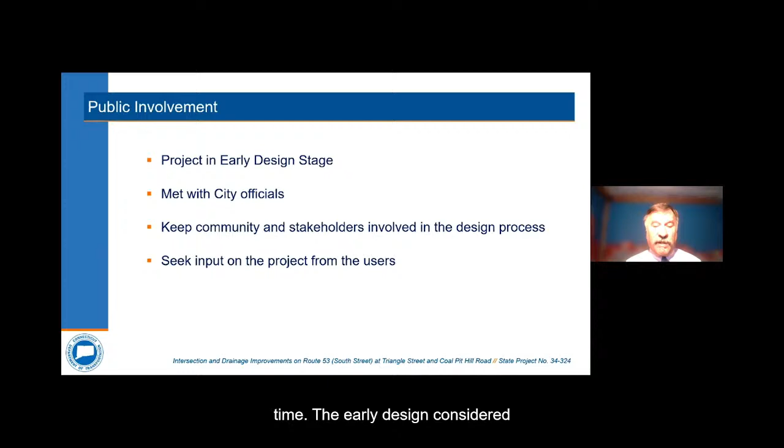And with that, I'm going to turn the presentation over to Al Bisacki, again from Kleinfelder. He's the design project manager here today. Al? Thank you, Brett. So as was noted, this project is early in the design phase, although it has been going on for quite some time. The early design considered alternative designs, and traffic analyses were completed on those alternative designs. Once a preferred alternative was selected, preliminary engineering and design was completed, and there were several meetings with city officials along the way, and we also solicited input, and I'll talk a little bit more about that in a few moments.

So as an overview, this project is located on the east side of the city, as can be shown on the map on the left-hand side. It involves several streets and intersections, and in the following slides, I'll describe the location in more detail and the proposed work.

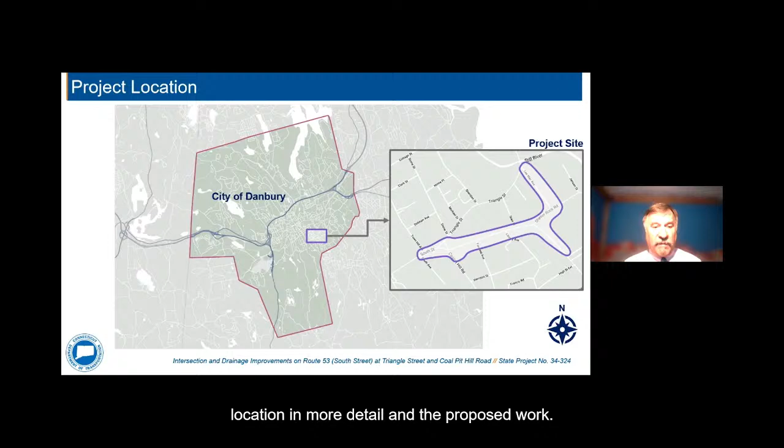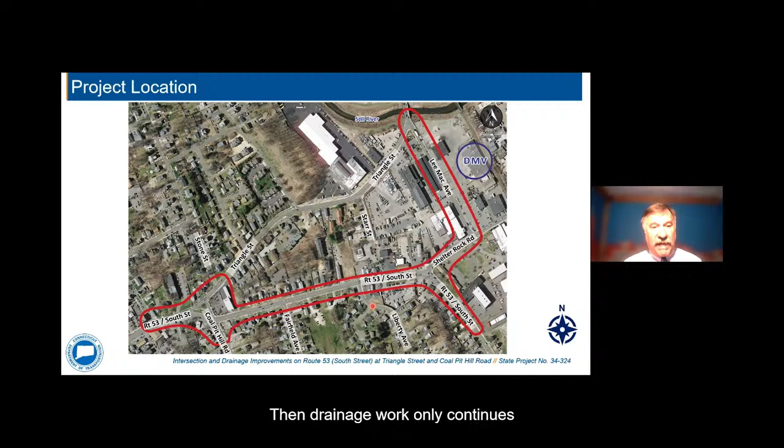The project starts on South Street, or Route 53, at the intersection of Town Hill Avenue. Moving west, it includes the intersection at Triangle Street and Coal Pit Hill Road. Then drainage work only continues down South Street to the intersection of Shelter Rock Road.

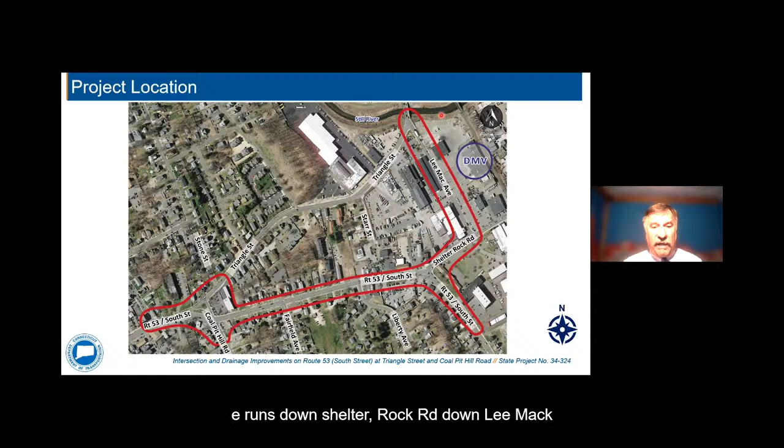There's additional drainage being done south of Shelter Rock Road. And then a major drainage outlet trunk line runs down Shelter Rock Road, down Lee Mac Avenue, and discharges at the Still River.

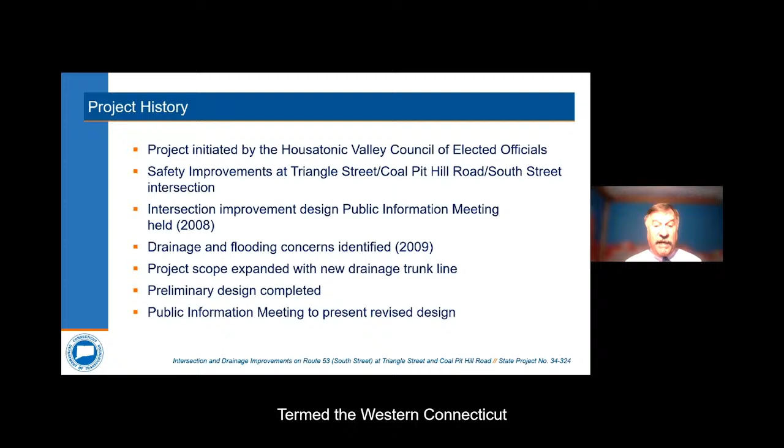Originally, this project was initiated as a safety improvement project. The City of Danbury was working with the Housatonic Valley Council of Elected Officials, or HVCEO, which is now termed the Western Connecticut Council of Governments. Originally, HVCEO submitted a proposal for the project to be developed. DOT, in coordination with the city, developed conceptual plans which received the endorsement of the city and HVCEO.

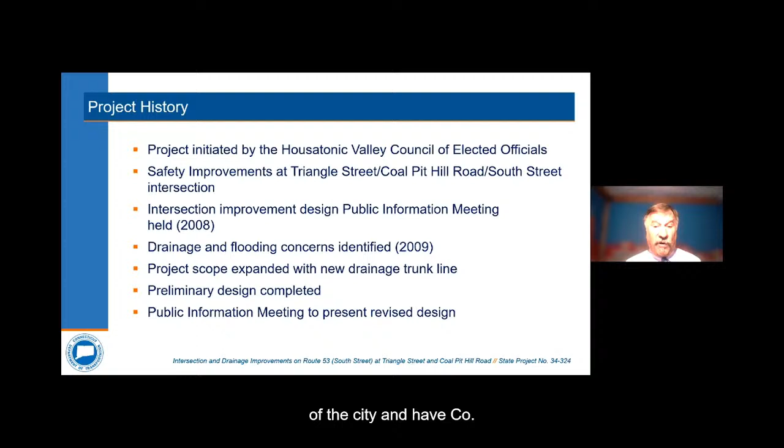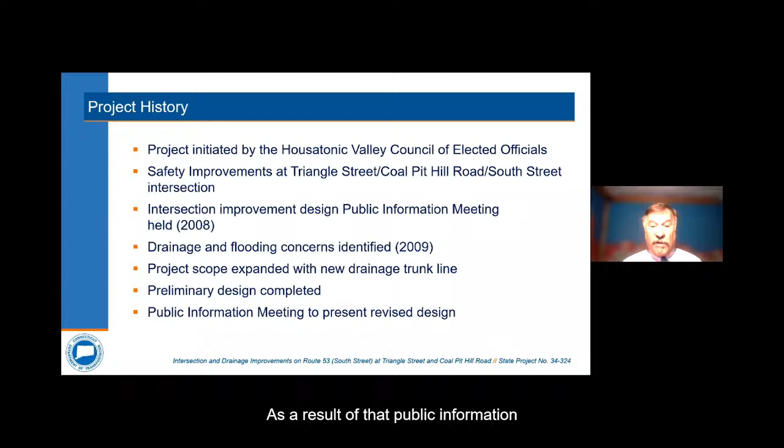Project design originally began in October of 2006. In 2008, the intersection improvements design received approval from DOT. A public information meeting similar to this one was held in 2008. As a result of that public information meeting and further discussions with the city, additional drainage and flooding concerns were identified in 2009.

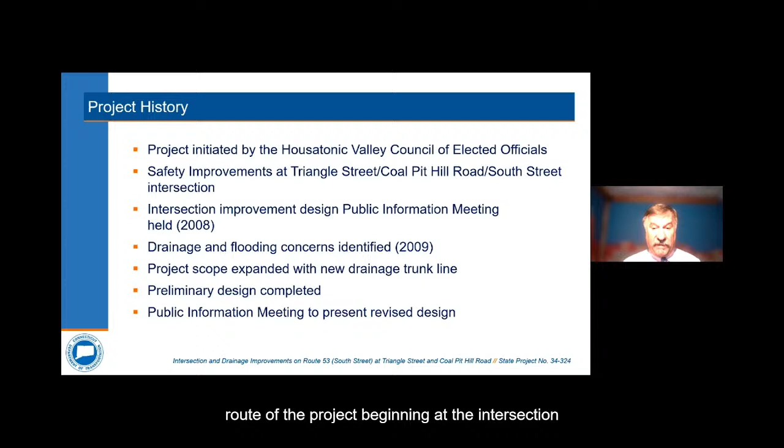In 2014, the scope for the project was expanded to include drainage along the entire route of the project, beginning at the intersection of Triangle Street and South Street, and a large diameter trunk line extending all the way to the Still River. In 2017, the preliminary design was updated to include that drainage work.

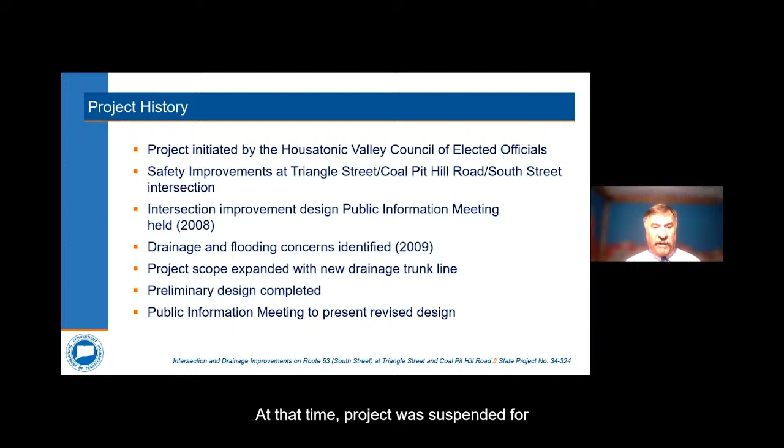At that time, the project was suspended for several years, and minor changes were made to the intersection lane arrangements at the Triangle Street Coal Pit Hill Road intersection. That brings us to today, where we're presenting the revised design in this public information meeting.

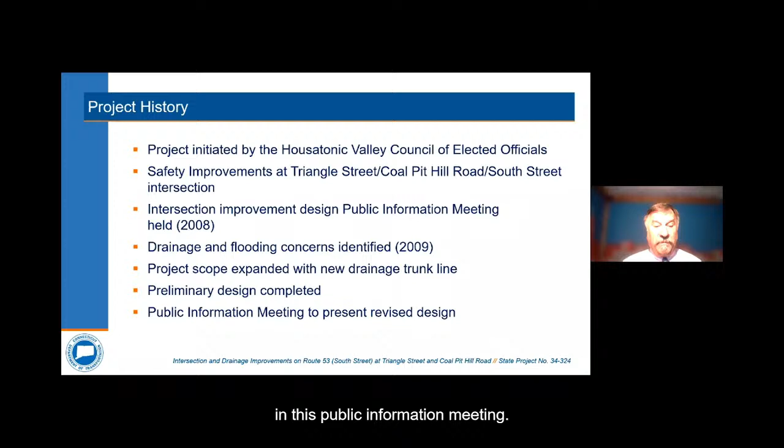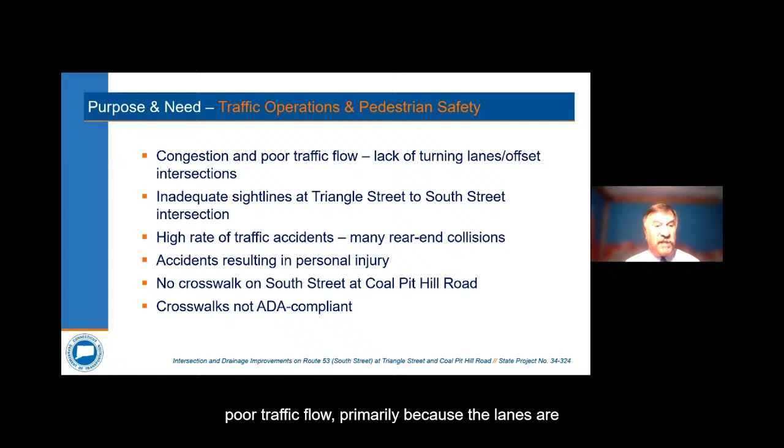So there are several purpose and need statements that drive and are goals for this project. The first revolves around traffic operations and pedestrian safety. There is congestion at the intersections and poor traffic flow, primarily because there's a lack of turning lanes, and the intersections are offset from each other. There are inadequate sight lines at Triangle Street to South Street.

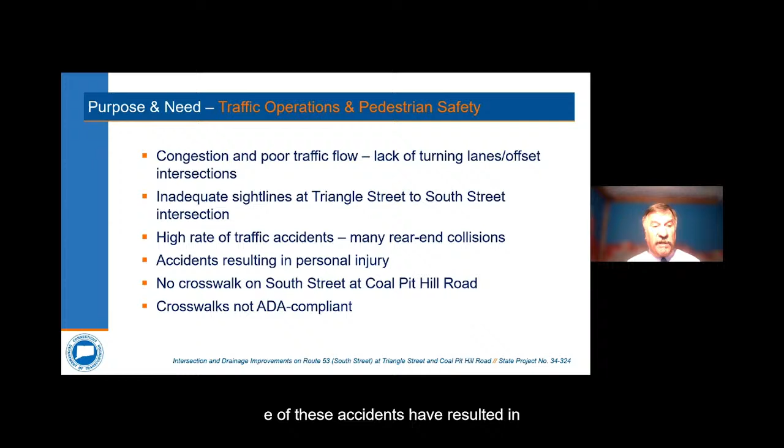There's a high rate of traffic accidents, many of which are rear-end collisions. Some of these accidents have resulted in personal injury. There are no crosswalks at South Street near Coal Pit Hill Road. And what crosswalks do exist within the project area are not ADA compliant.

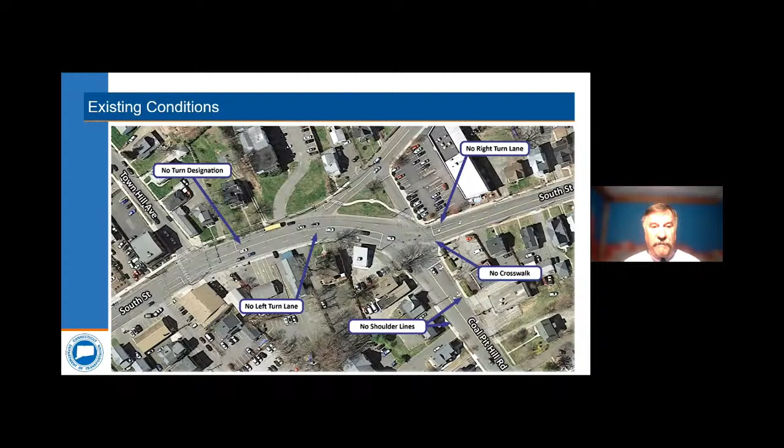So here's a map that shows what I just described. There's a lack of turning lanes at the intersections. The intersection of Coal Pit Hill Road and Coal Pit Hill Road Extension and Triangle Street are offset from each other. There are no crosswalks across South Street or Route 53, and the crosswalks that do exist are not ADA compliant.

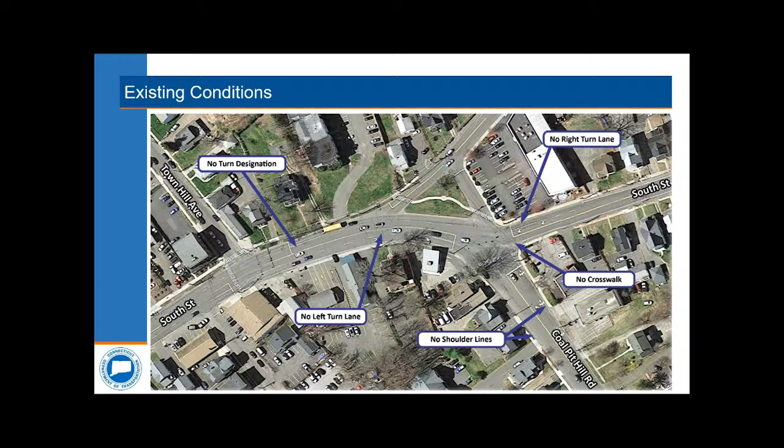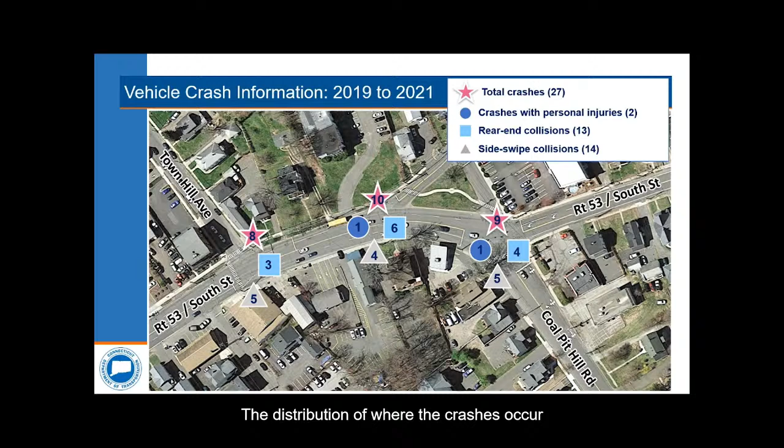The types of crashes include rear-end collisions and sideswipe collisions. And the split between those 2 types of collisions is about 50-50. Additionally, the distribution of where the crashes occur is about equal between the 3 intersections of Town Hill Avenue, Triangle Street, and Coal Pit Hill Road.

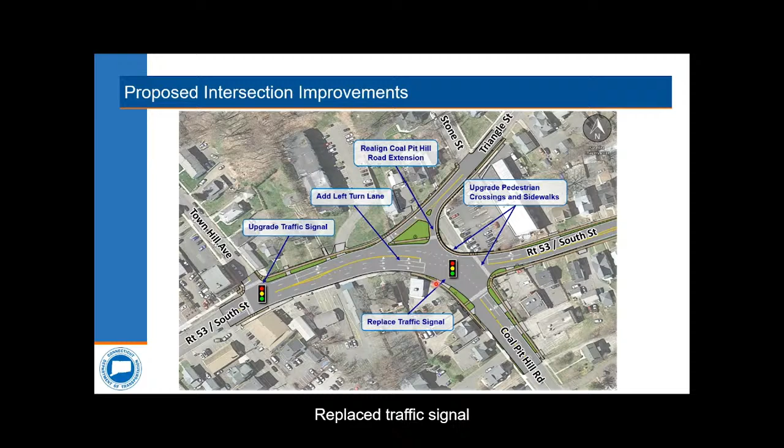The proposed intersection improvements include an upgraded traffic signal at Town Hill Avenue, an additional left lane approaching Coal Pit Hill Road so that traffic can turn safely onto Triangle Street, a replaced traffic signal at Coal Pit Hill Road, a realignment of Coal Pit Hill Road Extension with Route 53 to take advantage of the installation of the new traffic signal and improve safety, and upgrading pedestrian crossings and sidewalks throughout the project area in the vicinity of this intersection from Town Hill Avenue to Coal Pit Hill Road.

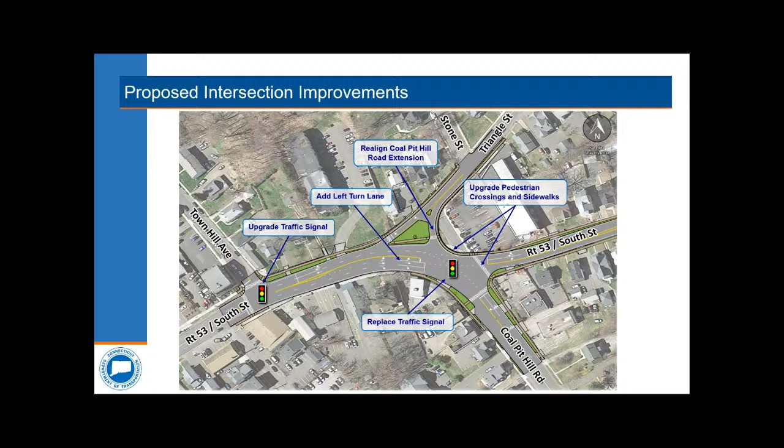With regard to the new traffic signals, the project goal is to make safety improvements without degrading or reducing what's called the level of service at the intersections. And very briefly, level of service is a measure of the delay experienced at an intersection, with A being good and F being poor. By way of reference, level A is when the delay to start moving when the light turns green is less than 10 seconds. At level C, when the light turns green, you have a delay of between 20 and 35 seconds. Level F is when there's over 80 seconds of delay after the light turns green.

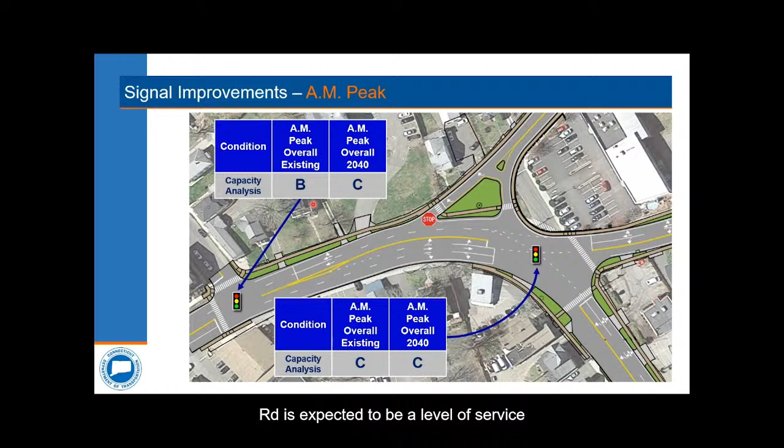So looking at the 2 traffic signals, when the project is complete, I should say, the level of service at Town Hill Avenue is expected to be a level of service B. In the year 2040, that will reduce slightly to a level of service C. At the Coal Pit Hill Road intersection, the when-complete level of service in the morning is expected to be C, and that remains level of service C in the year 2040.

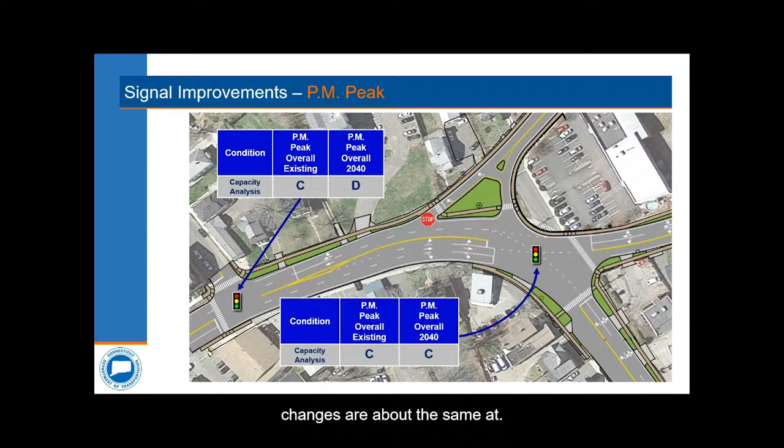In the afternoon, the level of service changes are about the same. At Town Hill Avenue, after construction is complete, we expect it to be a level of service C. In the year 2040, the level of service D is expected. At Coal Pit Hill Road, we maintain a level of service C when complete and in the future.

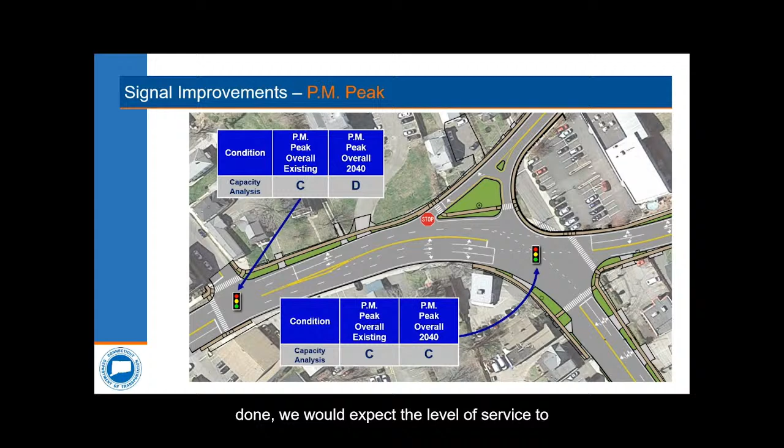And I would like to say that without traffic signal installations and without these improvements being done, we would expect the level of service to degrade further than level of service C and D at the intersections in the year 2040. The goal of this project, after all, is to improve safety without significantly impacting traffic operations, and this design will meet that goal.

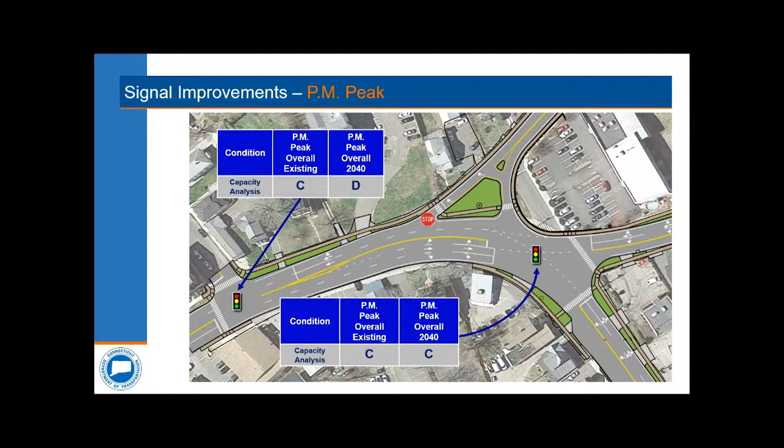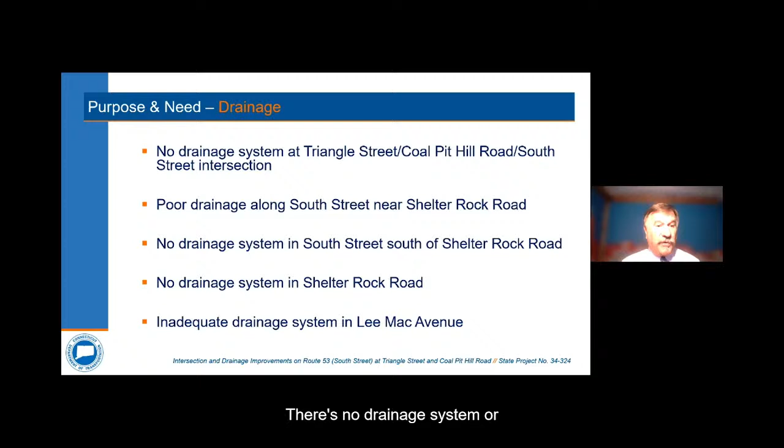The second purpose and need for the project, as was added on after the original public information meeting, is to improve drainage. There's no drainage system at all at the intersection of Triangle Street, Coal Pit Hill Road, and South Street. There's poor drainage along South Street near Shelter Rock Road. There is no drainage system in Shelter Rock Road. There's an inadequate drainage system in Lee Mac Avenue.

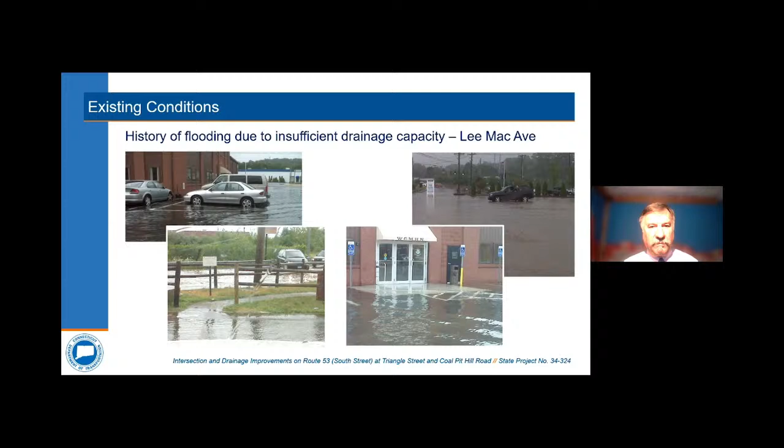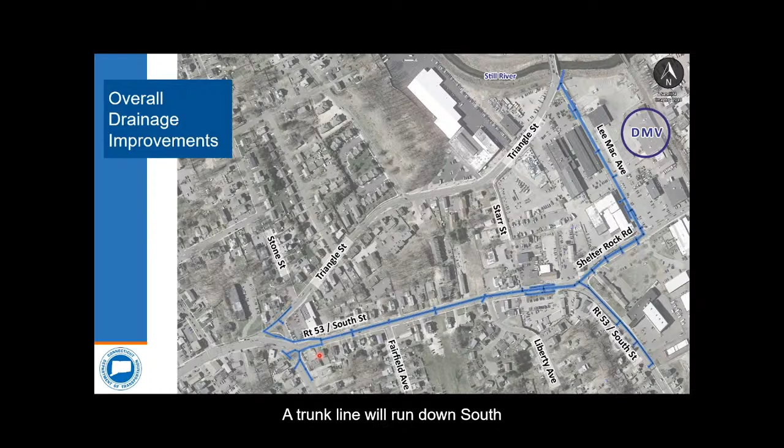This slide shows the overall drainage improvements throughout the entire project, and the proposed drainage is shown in the dark blue line. So beginning at Triangle Street, we are planning catch basins at the intersections, and I'll show that in a little bit more detail on the next slide. A trunk line will run down South Street with catch basins on both sides of the road. At an existing cross culvert, at a low point, there'll be additional catch basins. The trunk line will continue down Shelter Rock Road, then down Lee Mac Avenue, and will discharge at the Still River.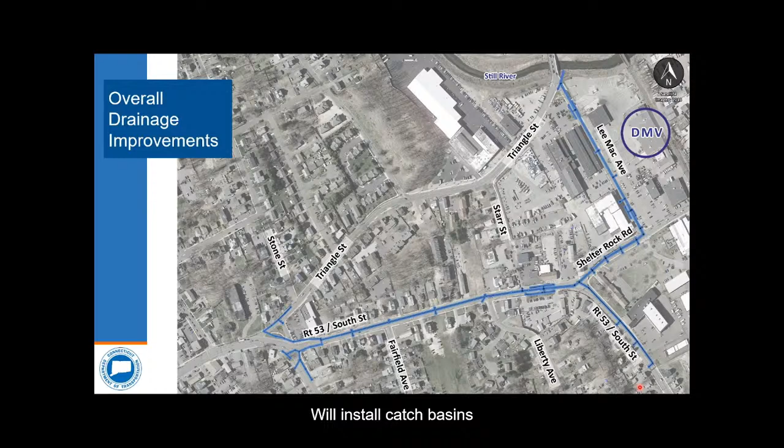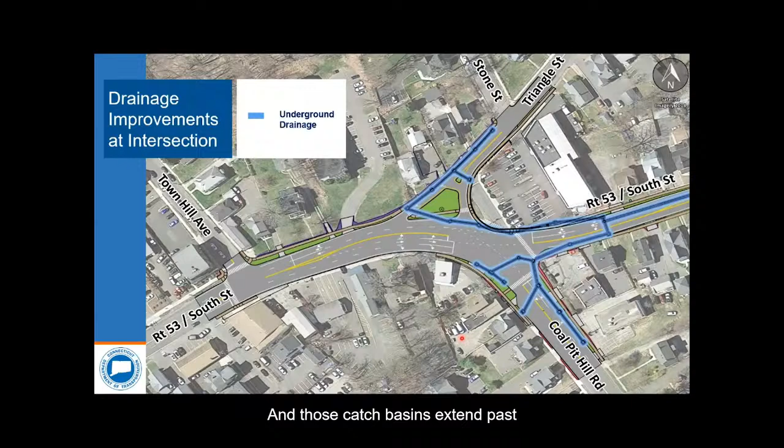Additionally, south of Shelter Rock Road on South Street, we'll install catch basins as far as is practical to improve drainage along that road. At the Triangle Street, Coal Pit Hill Road intersection, there are a number of new catch basins, and those catch basins extend past the intersections down Coal Pit Hill Road as far as we could practically go, and up Triangle Street again as far as we could practically go. The purpose of these catch basins is to reduce flooding and to increase safety for vehicles and pedestrians alike.

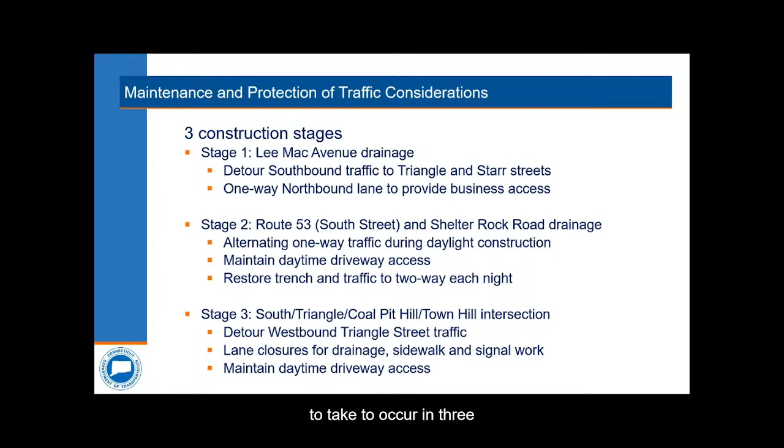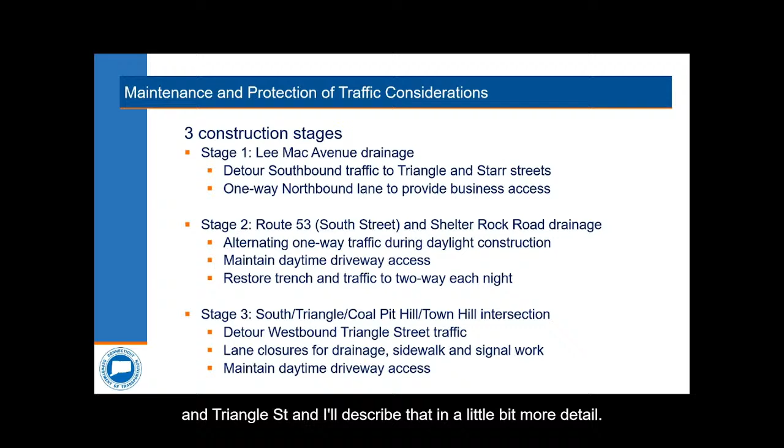Construction of all this work is expected to occur in 3 distinct stages. The first stage begins at the outlet of the Still River. The second stage continues along South Street, and the third stage is at the intersection of Coal Pit Hill Road and Triangle Street. And I'll describe that in a little bit more detail for each of the stages.

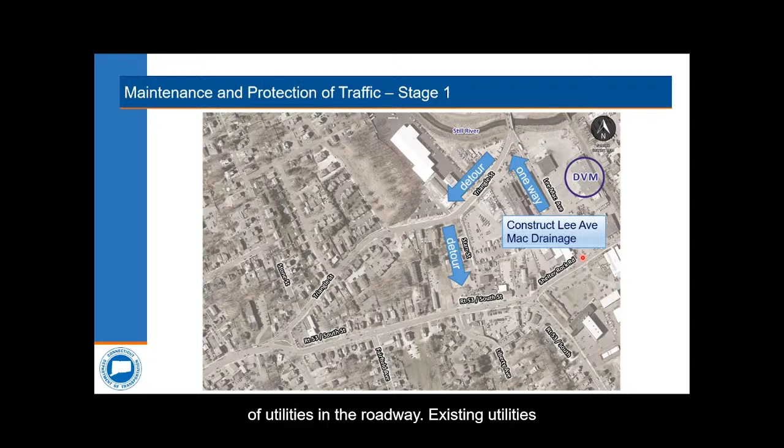Under the first stage, when the main trunk line is constructed from the Still River upstream in Lee Mac Avenue, because of the size of the pipe that needs to be installed and the amount of existing utilities in the roadway, we expect that we'll need one-way traffic on Lee Mac Avenue in the north direction, and traffic in the southerly direction on Lee Mac Avenue will be detoured onto Triangle Street, then to Starr Street, then back onto Route 53. We will provide access to all businesses and properties along Lee Mac Avenue and for all of the roads on the intersection at all times.

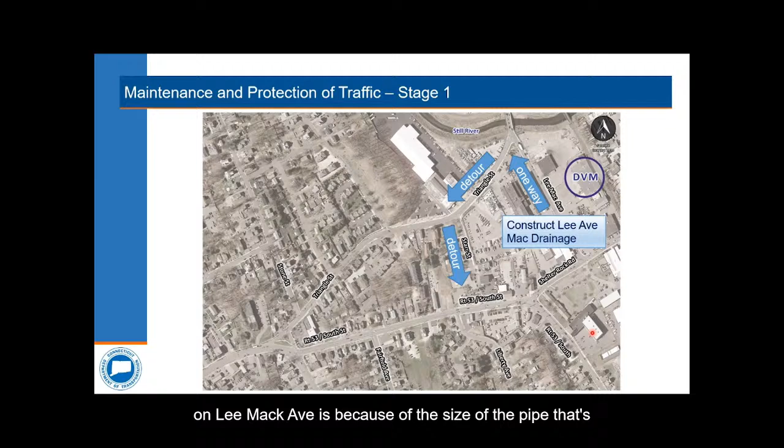Again, the reason for the restriction of one-way traffic on Lee Mac Avenue is because of the size of the pipe that's needed. And we do, of course, recognize that the Department of Motor Vehicles is on Lee Mac Avenue, and access to the DMV will be maintained at all times.

In stage 2, that trunk line, which starts to get a little bit smaller as it moves upstream, will be installed along Route 53 or South Street. For this section of work, we expect that we will have alternating one-way traffic around the construction zone as it advances from east to west up Route 53. This one-way traffic flow will be maintained either by temporary traffic signals or traffic persons. Once again, we will maintain driveway access to all properties at all times.

In the evening, we expect that the trench will be restored, covered with trench plates, and two-way traffic will resume for the nighttime hours. So there will be alternating one-way traffic during work hours only.

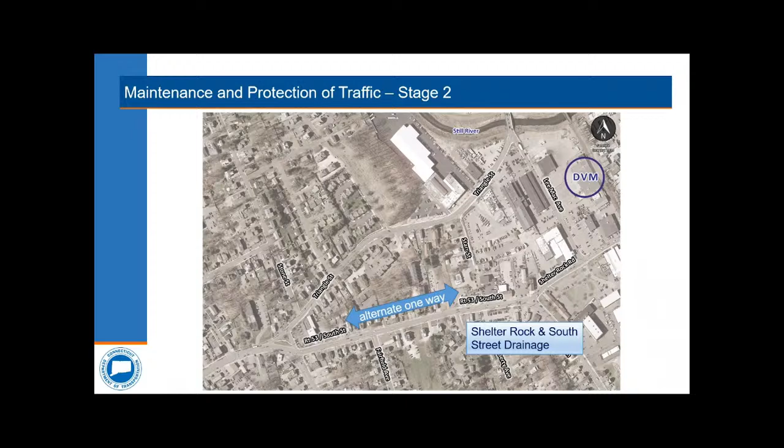In stage 3, the work will continue around the intersection of Triangle Street and Coal Pit Hill Road, then to Town Hill Avenue with the new traffic signal. We expect that there'll be individual lane closures as the drainage is installed, as the signals are installed, and as the crosswalks are installed. And once again, we will maintain daytime access for all properties.

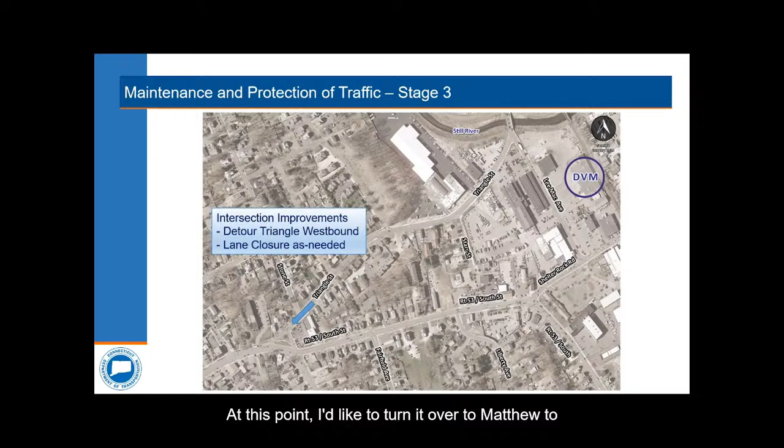At this point, I'd like to turn it over to Matthew so he can discuss the right-of-way process. Thanks, Al. I'm Matt Giannakopoulos. I'm a project coordinator with the Department's Division of Rights-of-Way. It is our office's responsibility to acquire all the property rights that are needed for transportation projects. We anticipate that this project will require the acquisition of some property rights, so I'd just like to give a brief overview of our right-of-way acquisition process.

We're still early on in the design process, so we don't have specific details on the property rights that will be required, but we anticipate the need for some strip or sliver acquisitions along the frontage of properties adjacent to the roadway, as well as some easements or drainage rights-of-way for the reconstructed drainage. But we do not anticipate impacting any homes, businesses, and no total takes of any properties are proposed.

Any property rights that end up being required will be acquired in accordance with the Connecticut General Statutes sections 13A-73 and 13A-98E. And whenever there is federal money used in any phase of a project, the department must adhere to what is known as the Uniform Act. You can go to the next slide.

Once the design has moved to the point where we're ready to begin the right-of-way acquisition process, each property owner will receive a letter of intent to acquire from our office along with a property map which depicts the exact rights to be acquired. At that point, we determine the fair market value of those rights, and we use that value to establish an offer of just compensation. That offer is then sent out to the property owner in writing, and a right-of-way agent is available to meet with the property owner.

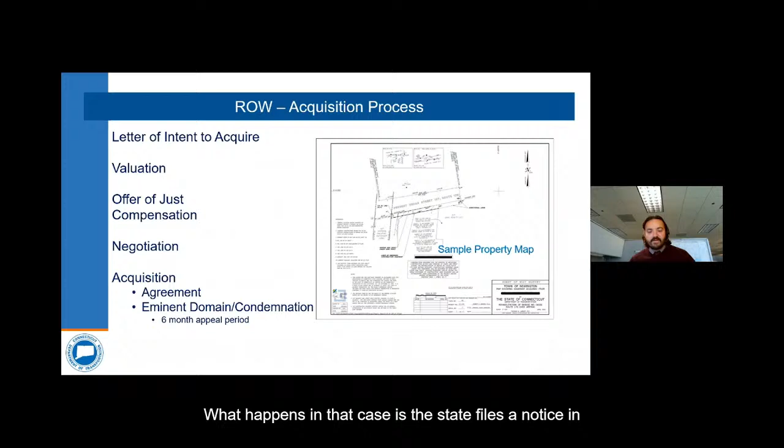However, if negotiations reach an impasse, in order to keep everything on schedule and allow the project to move forward, the department may acquire those rights through its power of eminent domain. What happens in that case is the state files a notice in the local superior court along with a monetary deposit in the amount of the state's offer of just compensation. The property owner would have 6 months from that date to file for an appeal if they felt that the offer was inadequate. Now, whether or not the property owner chooses to use their right to appeal, the money that was deposited in the court is available to be withdrawn by the owner at any time.

So I know a lot of people, they hear eminent domain, they think, oh, the state just takes my house for $1. But that's not the case. All property owners are entitled to at least that original offer of just compensation, and the state only takes title to the property rights that they need for the project. I'll be here after the presentation and going forward to answer any questions on the right-of-way acquisition process. But in the meantime, I'm going to hand it back to Al to conclude the presentation.

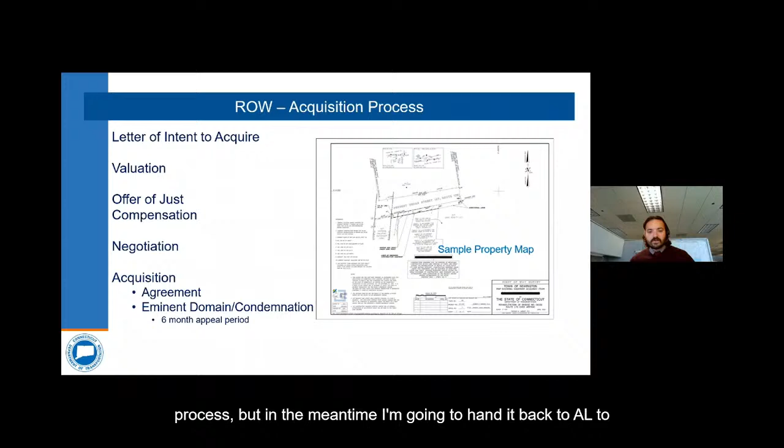Okay, thank you, Matthew. So the final couple of slides revolve around environmental review and then cost and schedule. So the preliminary engineering work that we did included some work on permits to determine what the impacts of the project are and what the permit needs are. We have determined that there are no endangered species within the work areas and that there will be no effect on historic properties. The primary permit that we do need is a stormwater discharge permit for construction of the outlet to the Still River.

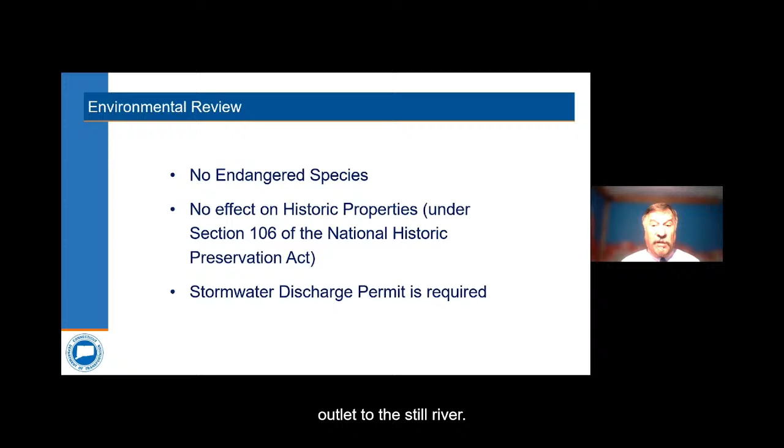So our current schedule is that design will continue beginning this summer at the conclusion of this public information meeting and the follow-up work that needs to be done after that. The design work will continue through the fall and winter, and we expect it to be complete by June of the year 2023. This will allow us to advertise for construction contractors in the summer of 2023. That will allow a construction start in the spring of 2024.

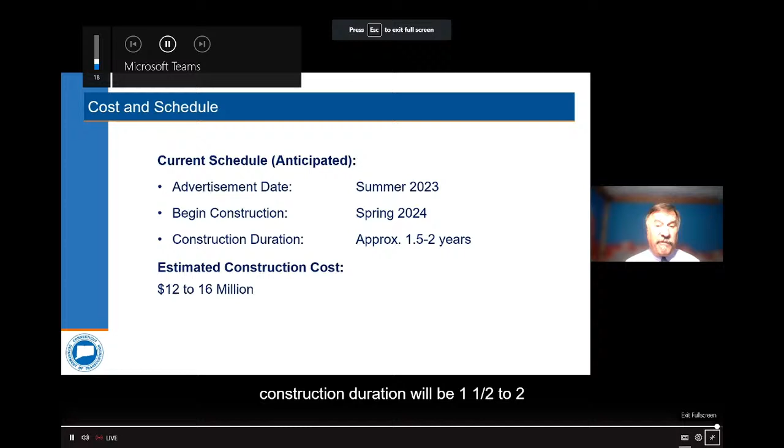We expect that the construction duration will be 1.5 to 2 years. It is a very long project along a long route with large drainage pipe, and we want to maintain safe traffic during all that construction period, and that does contribute somewhat to the long construction duration.

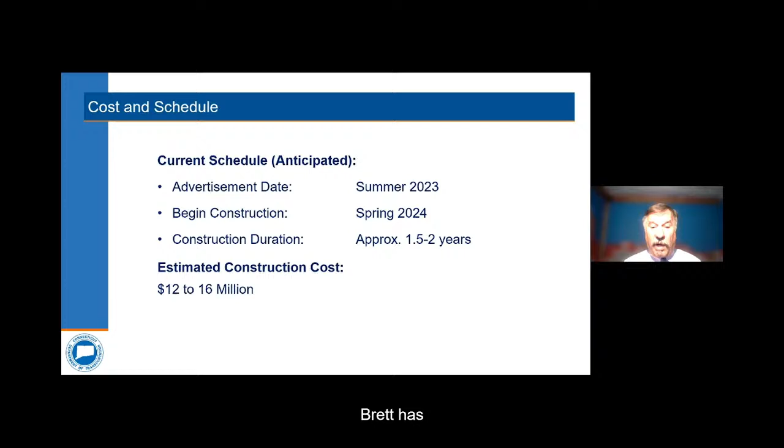The estimated construction cost is $12 to $16 million. There's 80% federal funding for this project and 20% state funding. There is no city funding required for this project. Now, Brett has got some slides to go through and an explanation of how you can ask questions.

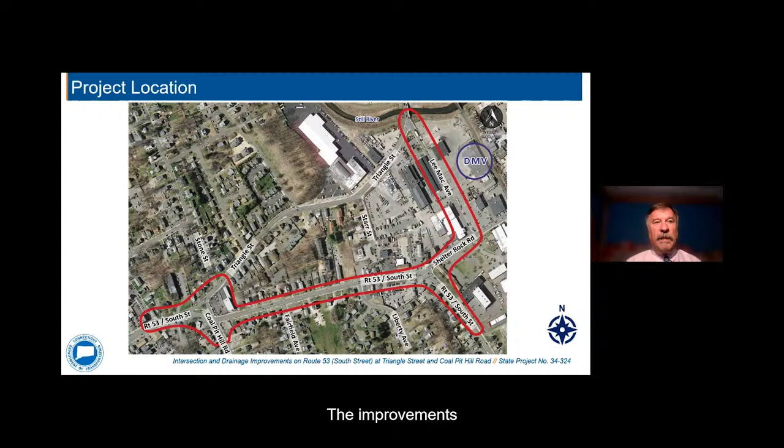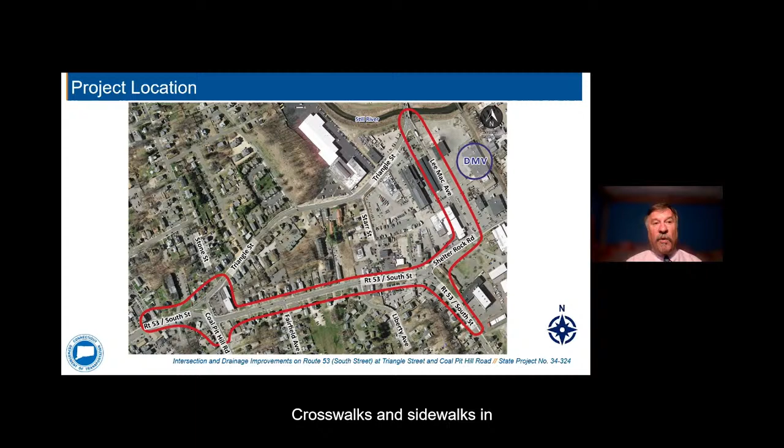Thanks. That is a good question, and it's a tough one. The improvements are limited to primarily the intersection work necessary to improve the safety of the intersection at Coal Pit Hill Road and Triangle Street. There are the traffic signals, as I mentioned, and new ADA compliant crosswalks and sidewalks in that area. There are not, however, planned dedicated bicycle paths.

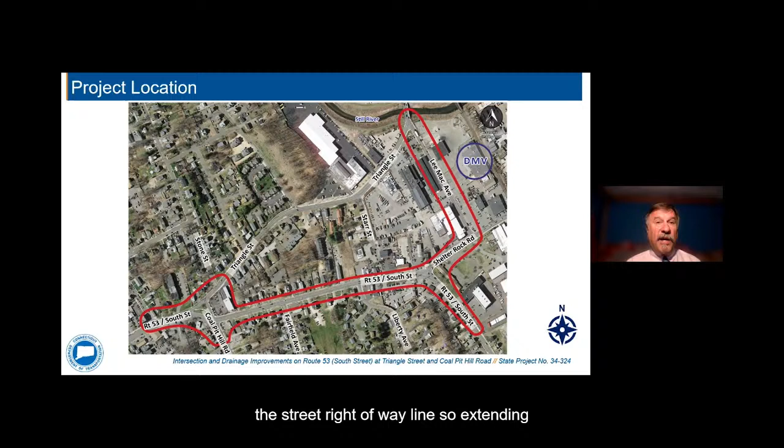And the primary reason for that is because of the width of South Street and the properties along South Street. There's not enough width currently on South Street to have a dedicated bicycle lane. And the properties are very close to the street right-of-way line, so extending and expanding the roadway through that area would have a lot of impact to those properties potentially.

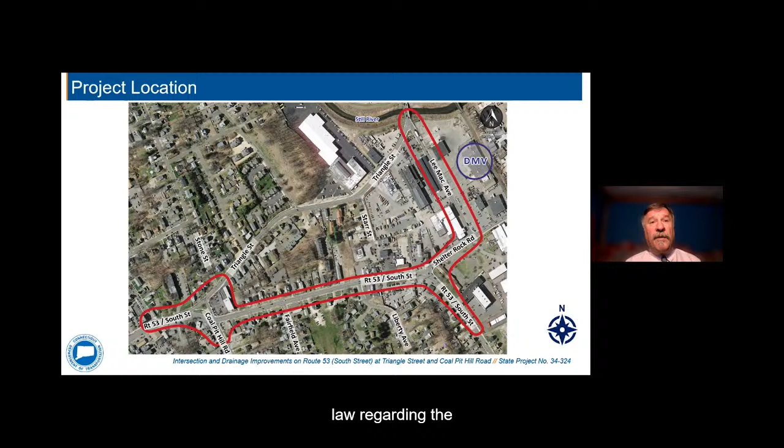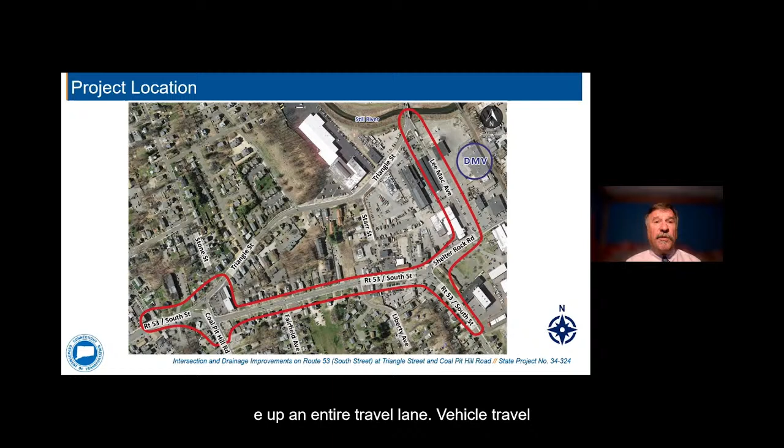I do want to, however, point out that there have been some recent changes in state law regarding the room and the respect that motor vehicles are required and should give to bicycle riders. A minimum of 3 feet is required passing bicycles. Bicycles can take up an entire vehicle travel lane when there is no dedicated bicycle lane. So while we are not able to increase the width of South Street to accommodate dedicated bicycle lanes, there are changes in state law that do make bicycle riding safer for bicyclists.

Thank you, Al. Again, thank you again for bearing with us during these technical difficulties tonight.

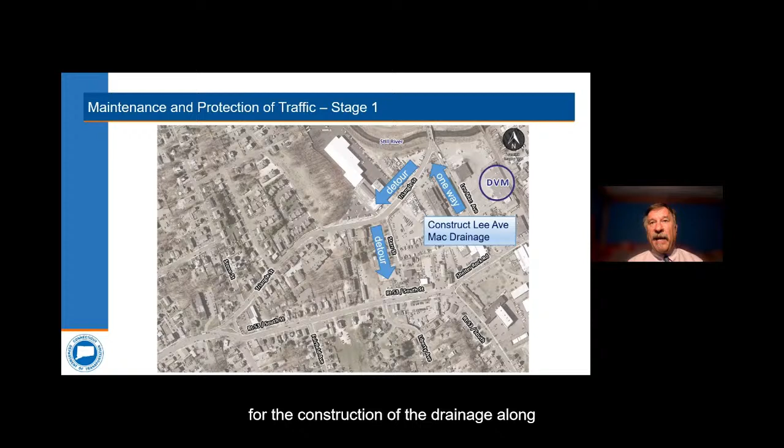Okay, very good. So this is the stage 1 maintenance and protection of traffic graphic. Let me see if I can get my pointer to work here. Oh, Brett, I think I clicked when I shouldn't have, so I lost the screen here. Okay. Oh, I got it back. I can't use the pointer, however, so I'll just have to paint a word picture for everyone. So stage 1 is for the construction of the drainage along Lee Mac Avenue. It starts at the Still River at the outlet and will proceed in a southerly direction along Lee Mac Avenue.

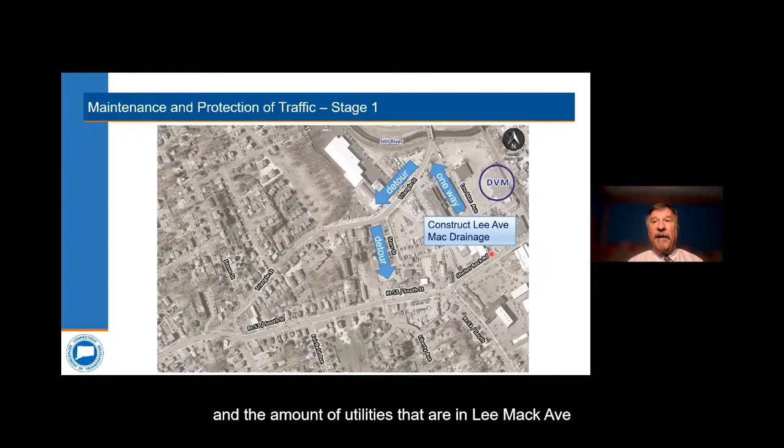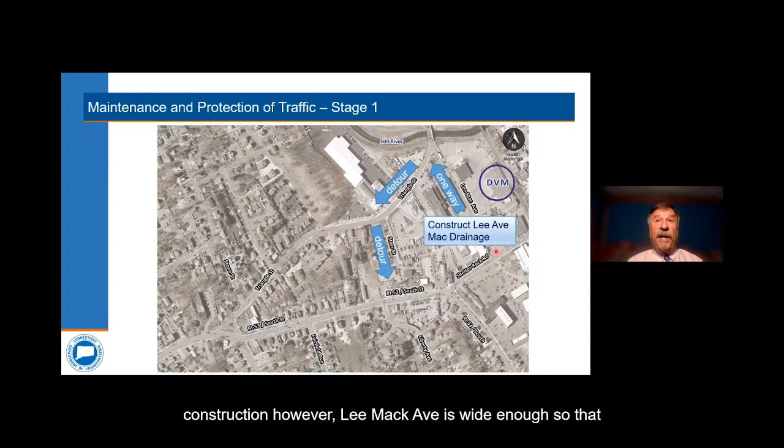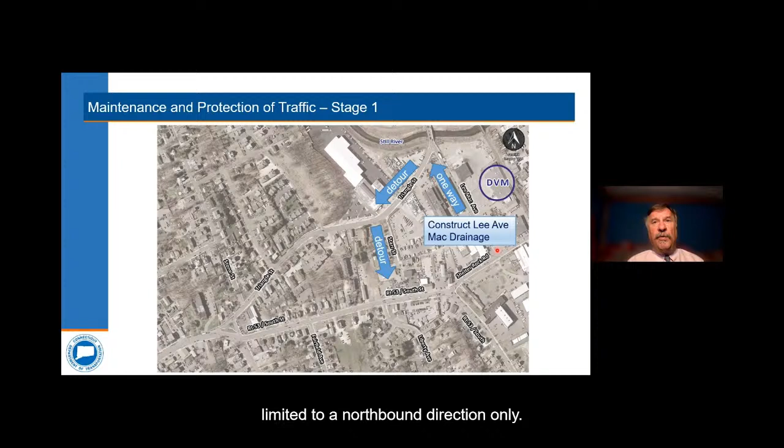Because of the size of the drainage pipes and the amount of utilities that are in Lee Mac Avenue, the excavation will be fairly large to install that pipeline. Covering or plating over that excavation every night will be very difficult. It will be time consuming, and it will significantly slow the overall progress of construction. However, Lee Mac Avenue is wide enough so that we can maintain a single lane of traffic through the construction zone, and the construction zone will move in increments down Lee Mac Avenue from north to south. So vehicles will be able to get around the construction zone, but overall traffic on Lee Mac will be limited to a northbound direction only.

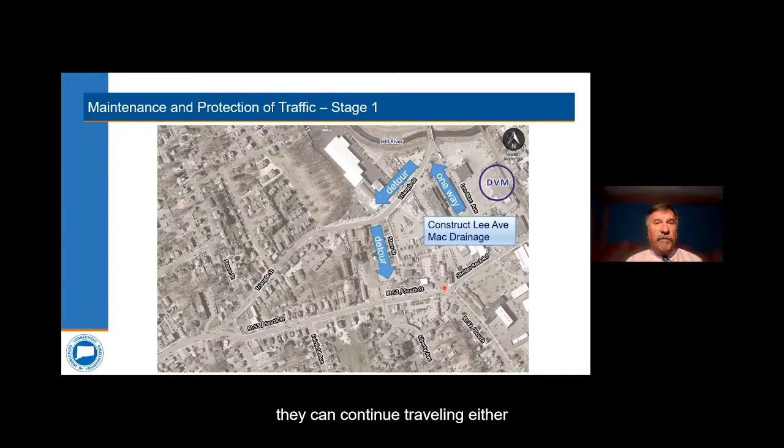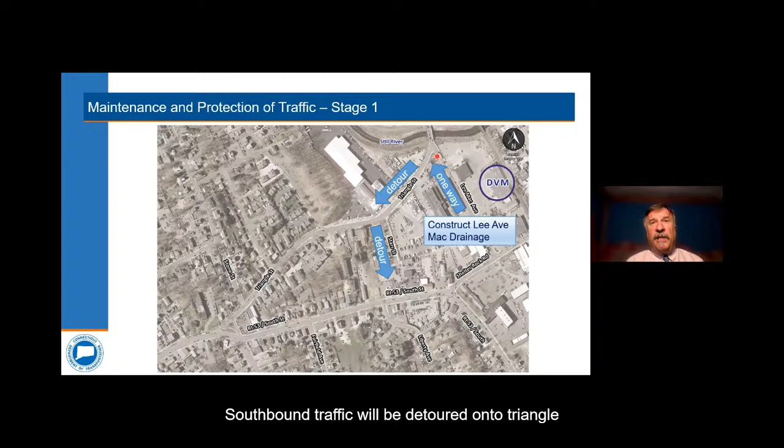Traffic on Triangle Street crossing the Still River Bridge and approaching Lee Mac Avenue will be detoured down Triangle Street and then down Starr Street and then to Route 53, where they can continue traveling either east or west to their destination from that point. So to recap, during construction of the large trunk line down Lee Mac Avenue, traffic will be restricted to one way in the northbound direction. Southbound traffic will be detoured onto Triangle Street, then onto Starr Street.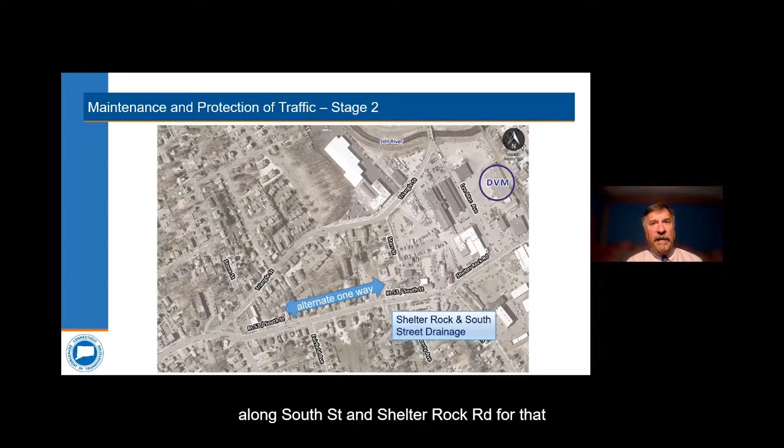Brett, if you want to just go to the next slide, I'll describe stage 2 of maintenance protection of traffic. So this includes the construction work along South Street and Shelter Rock Road, for that matter. And again, this is for construction of the main trunk line and the associated drainage along that trunk line.

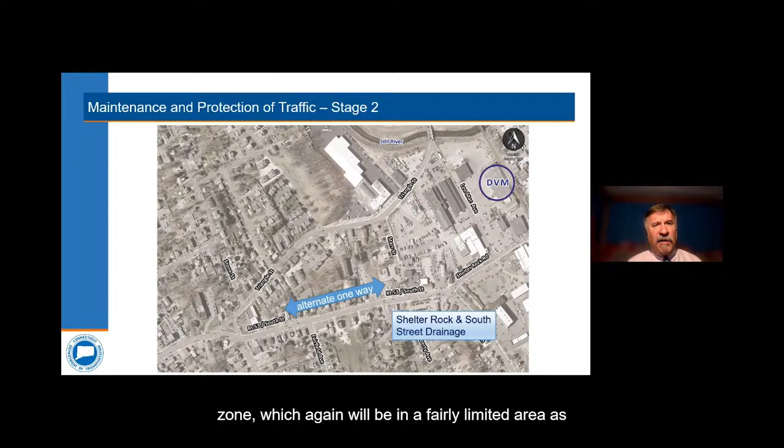In this case, along this stage 2 of the route, we will provide alternating one-way travel past the work zone, which again will be in a fairly limited area as the pipe installation progresses from east to west. That one-way traffic flow will be maintained either with temporary traffic signals or with traffic persons.

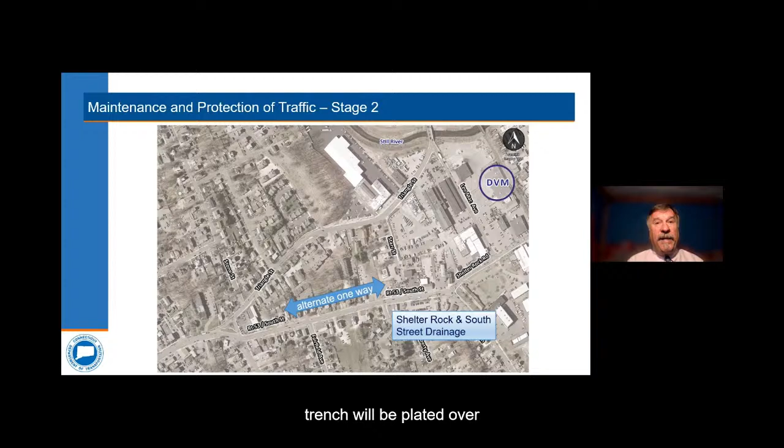We should be able to, when construction is not occurring during the night, because it's daytime construction only for this work, the roadway, the trench will be plated over and two-way traffic flow will be resuming for non-construction work hours.

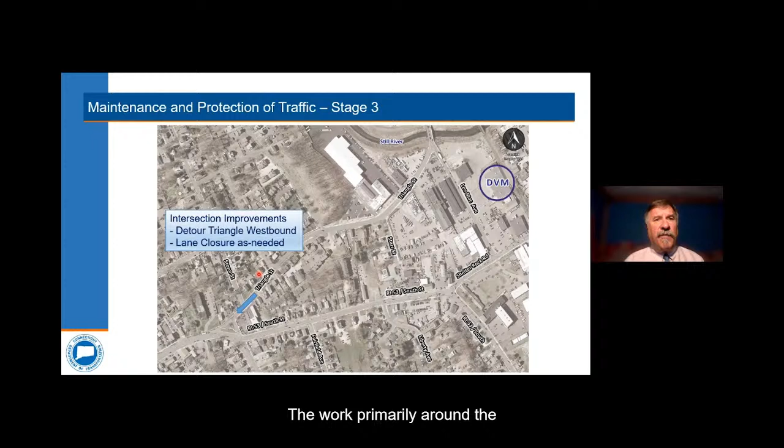For stage 3, the work primarily around the intersections of Triangle Street, Coal Pit Hill Road, and Town Hill Road that involves the traffic signals, new span poles for the traffic signals, some minor realignment of the Triangle Street portion of the roadway, construction of new crosswalks and sidewalks along the roadway.

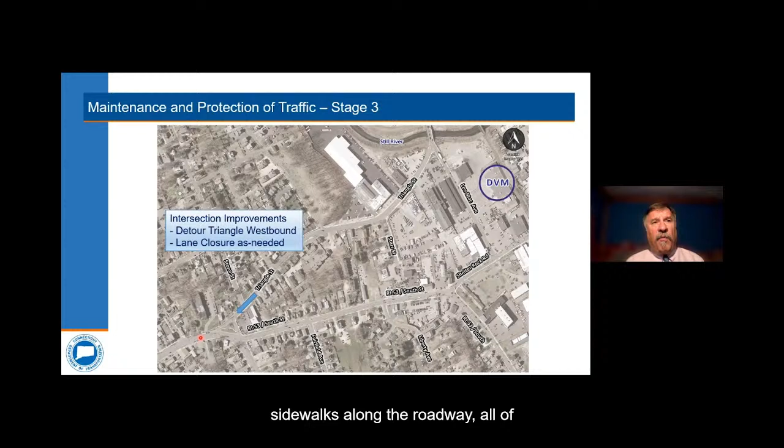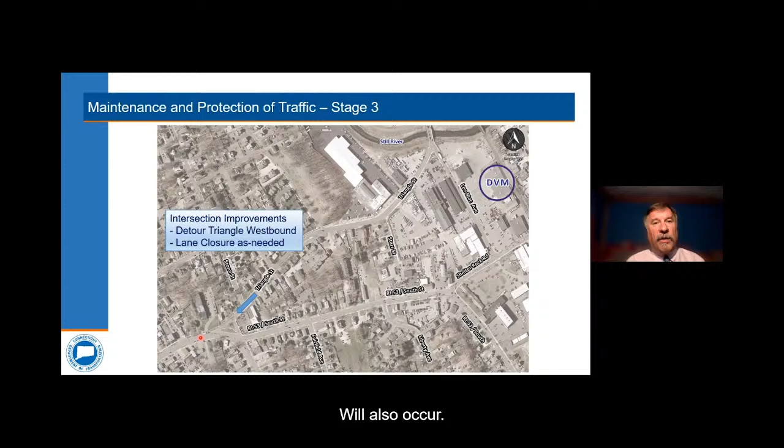All of that work will occur with lane closures only as work proceeds on the side of the road and adjacent to the road. The drainage system installation will also occur with single lane only closures. There may be some times when one-way traffic needs to be directed through during particularly critical times when that drainage system is installed.

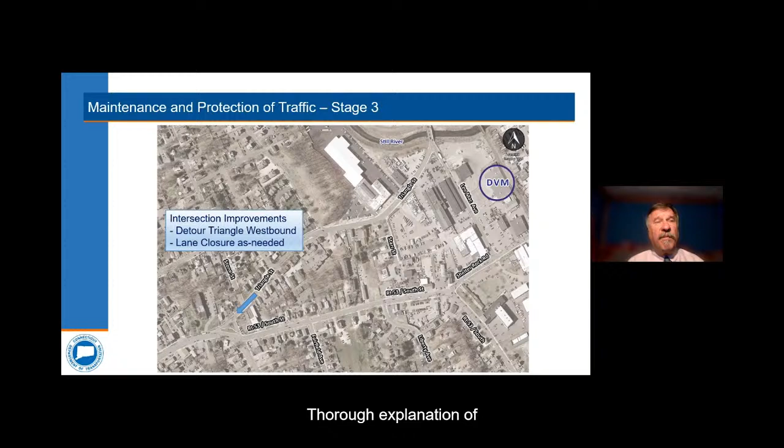But again, there may be a detour on Triangle Street at the Coal Pit Hill Road extension, but that'll be a very short detour just around that immediate work zone. It's not a longer detour such as we will have with the stage 1 construction. So hopefully that's a thorough explanation of our expected maintenance protection of traffic schemes.